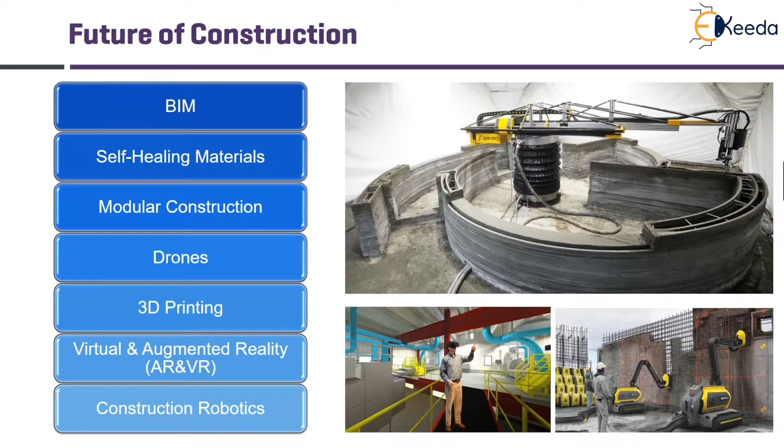Moving further to self healing materials. Self healing materials are artificial or synthetically created substances that have the built-in ability to automatically repair damages to themselves without any external diagnosis of the problem or human intervention.

In recent times, we have come across two main types of self healing materials used in construction industry, that is the bioconcrete and self healing steel. Other self healing fabrics and metals have been long used by NASA and other space agencies to coat spacecrafts so as to resist any damage in the space.

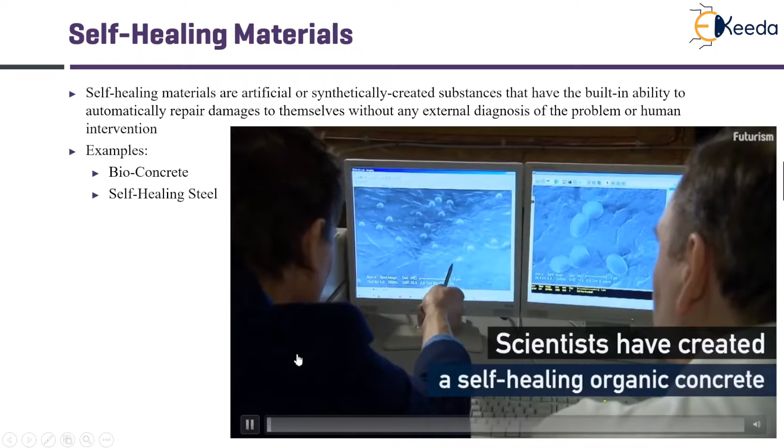Let us take a look at this video of how bioconcrete plays a vital role to change the dynamics of construction.

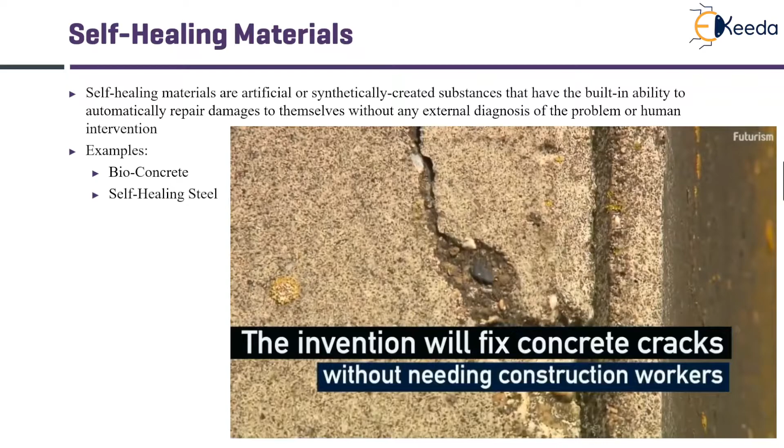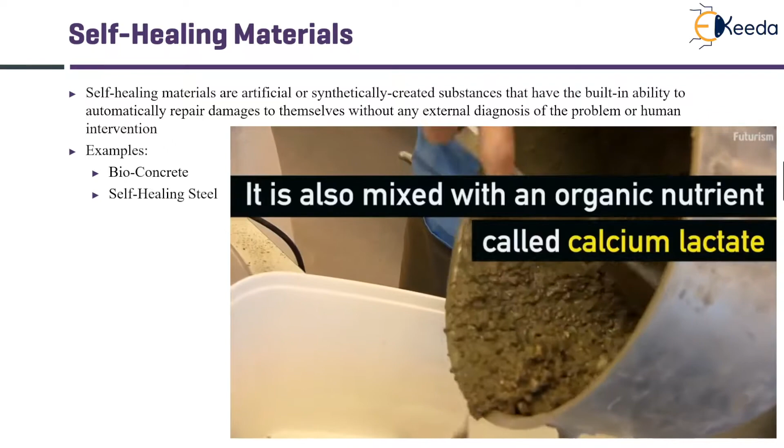Scientists have created a type of concrete with bacteria, with the intervention of which will fix any types of cracks. The concrete here is mixed with bacteria called Bacillus pseudofirmus. It is also mixed with an organic nutrient called calcium lactate. The bacteria can lie dormant in the concrete for up to 200 years after the construction, and as soon as

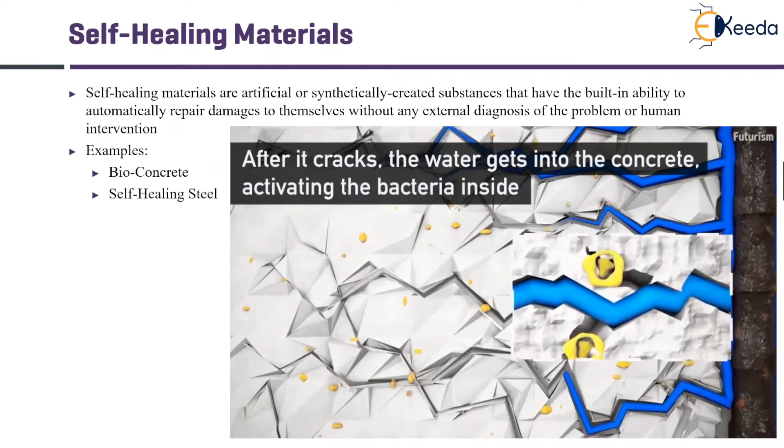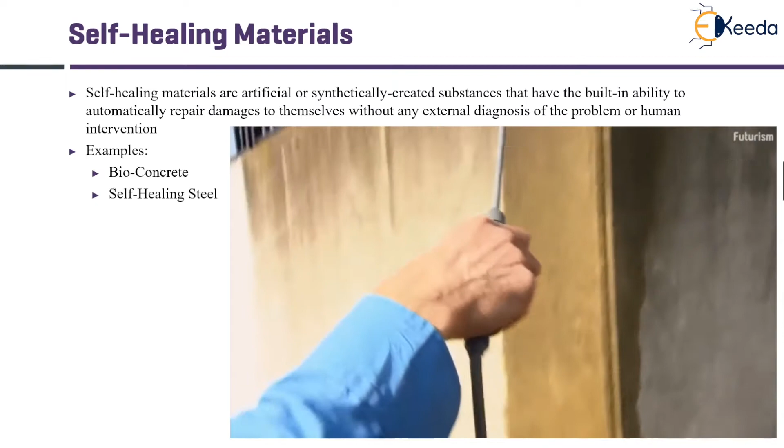there is a crack, water gets into this concrete area and the bacteria gets activated. Bacteria will automatically produce limestone, which will fill up the entire gaps. Thus, without any human intervention, the cracks are closed.

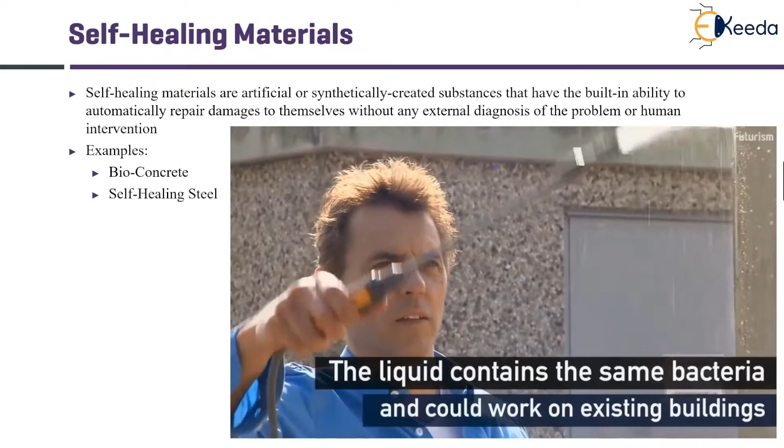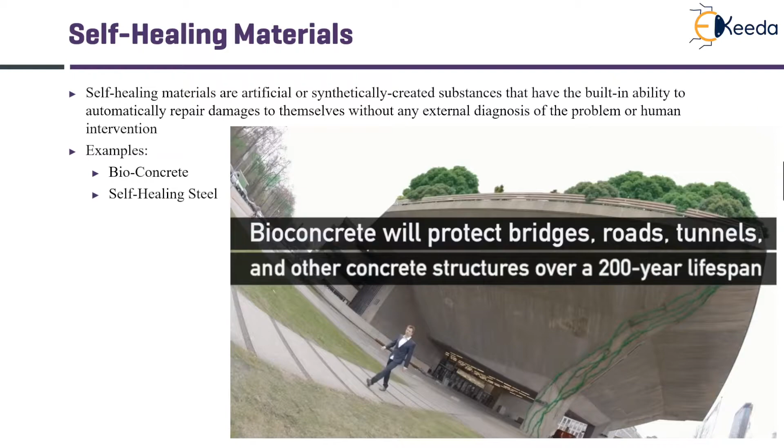Scientists are also working on preparing a liquid base that contains the same bacteria and can help the existing building to also become self healing. Bioconcrete thus will protect bridges, roads, tunnels, and other concrete structures for over a 200-year lifespan, that is almost two times increase than the current design lifespan of concrete structure, that is 100 years.

Bioconcrete, though limited in production, is still under more research and we hope that we soon will be using it.

Similarly, self-healing steel can help in healing large steel bridges in which sometimes, due to fatigue and other stresses, cracks develop which can ultimately lead to failure of the entire bridge. So these cracks get easily healed up.

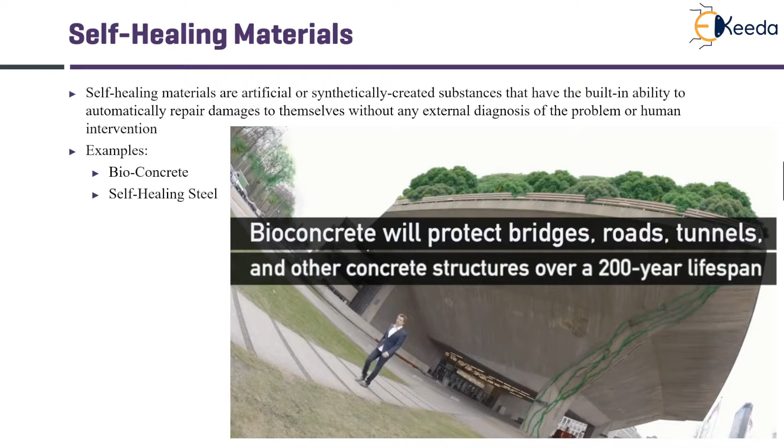Next is modular construction. With the growth of population, there is more and more demand of housing. Therefore, the government has also launched various housing for all schemes - Pradhan Mantri Awas Yojana, Atal Awas Yojana, etc. So, with more focus on affordable housing, traditional construction methods cannot match that speed. Therefore, modular construction has become the next big thing in this industry.

Modular construction is the method by which a building or home is constructed off-site within a factory setting. The most common types of modular buildings that are being built are schools, military bases, small housing complexes, and industrial facilities.

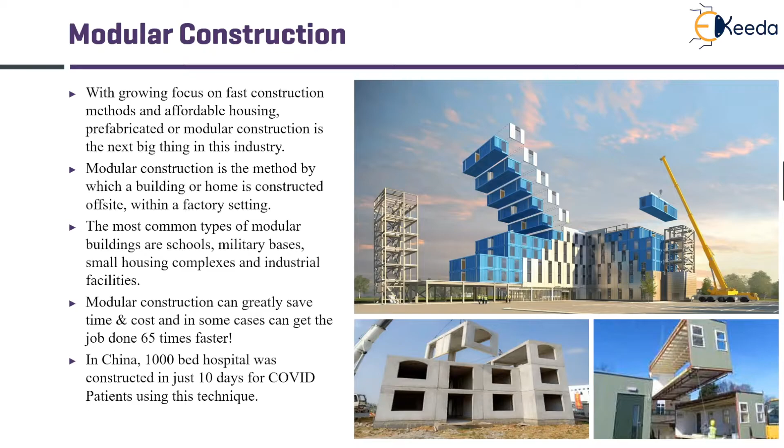Thus, modular construction can greatly save time and cost, and there is very minimum labor required on site to fix this. The job can almost get 65 times faster. That's huge. Also, recently we have seen in China that a 1,000-bed hospital was constructed in just 10 days for COVID patients using modular construction techniques.

Next big thing in construction is the use of drones. We all know about what drones can do, but in construction industry especially, the growth recorded is 239% more than any other allied industries like mining, agriculture, surveying, or real estate. This is because there are huge number of benefits associated with using drones during construction phase.

They can give on-demand images from locations which are unsafe for any person to go. This gives an increased site safety. Remote access to the current status of site can be obtained. It helps in better documentation and faster reconciliation with subcontractors since you can get real time progress. This helps in huge cost and time saving, and it will give accurate and comprehensive data.

Today, the applications of drones are in areas of land surveying, inspections, providing visual materials for the client and staff like drone photography, aerial videos, etc., monitoring on site activities as a security surveillance, and mapping the overall construction data, which will help in project management.

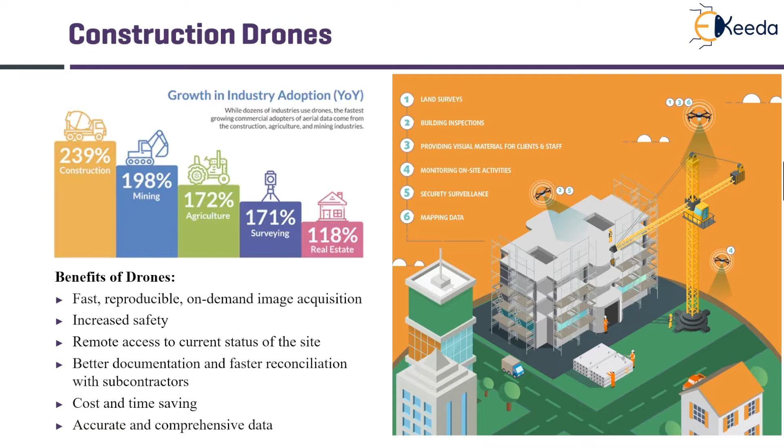Let us take a look of how drones are being used at construction site.

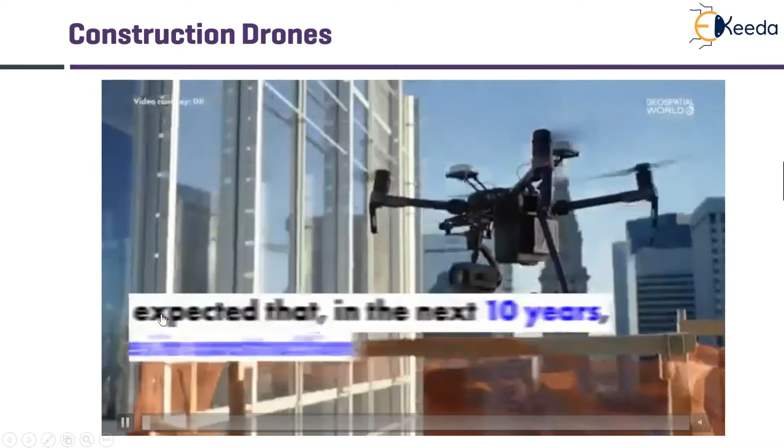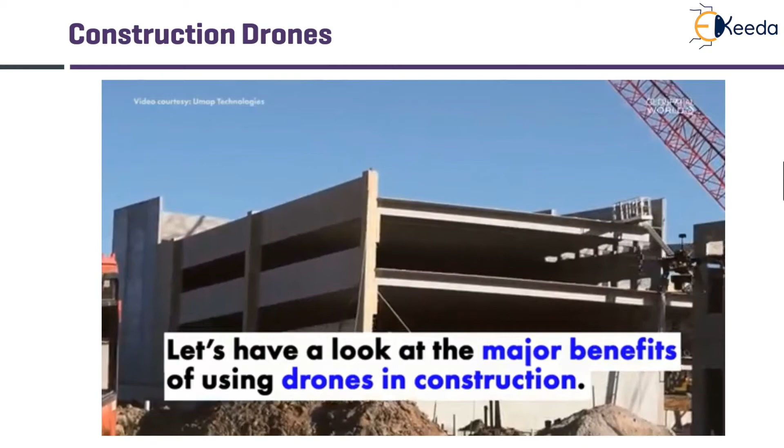It is expected that in the next 10 years, the use of drones in construction will further register a manifold growth. The major benefits of using drones in construction, as we have earlier discussed, are that they will lower the cost of projects and increase productivity. Use of drones will create newer type of jobs and further add value to construction industry.

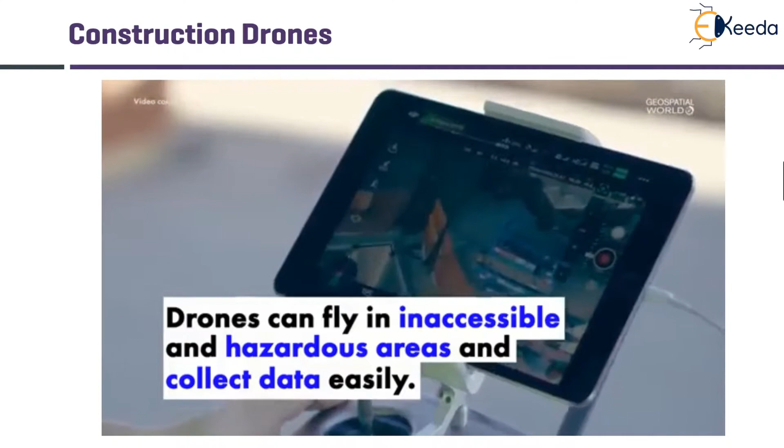Drones can fly to inaccessible and hazardous areas and can easily collect the data from there. They will provide real-time information that will significantly improve the surveying accuracy. Drones give professionals easy access to data across different departments. Also, the insurance costs for these drones are low as compared to on-site workers.

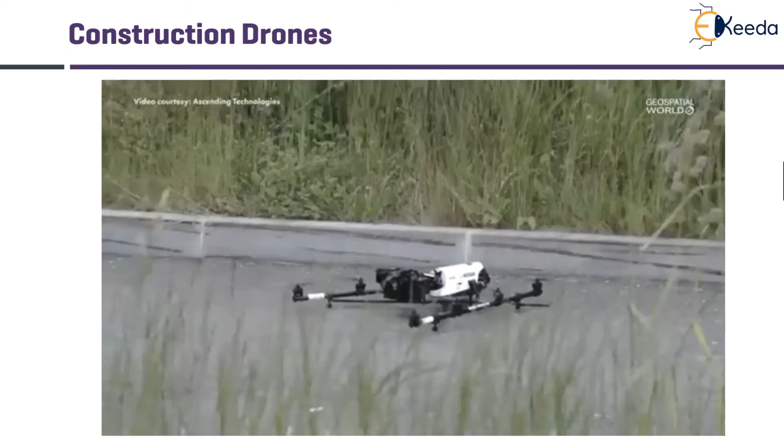Drones are fast, capable of completing a complete inspection in less than 15 minutes. Thus, drones are providing enhanced site data sets, surveying data, topographical data, etc., with good photographic visualizations.

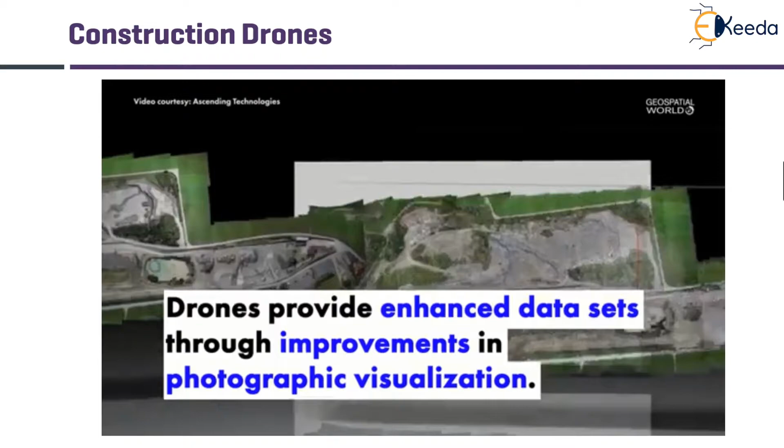Next big thing is 3D printing. Already a lot of progress has been done in this direction in the past 1 decade. 3D printing, sometimes referred to as additive manufacturing, is a computer controlled sequential layering of materials to create three-dimensional shapes.

A 3D model of the item is created either in CAD system or in the BIM model. The printer then reads the design, lays down successive layers of the printing medium, which can be concrete, any kind of powder, or a liquid material, which are then joined or fused to create the complete item.

Thus, 3D printing gives huge amount of benefits to construction industry, and obviously this is very sustainable. The construction will be accurate, faster, and directly will convert a digital design into physical.

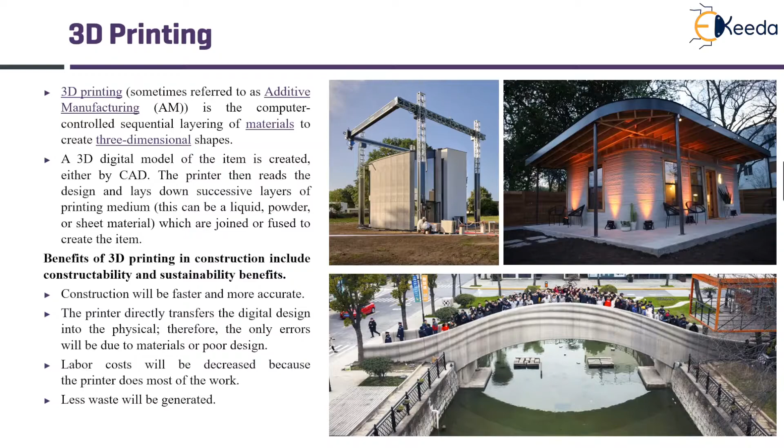Let us take a look at 3D printing for world's largest building.

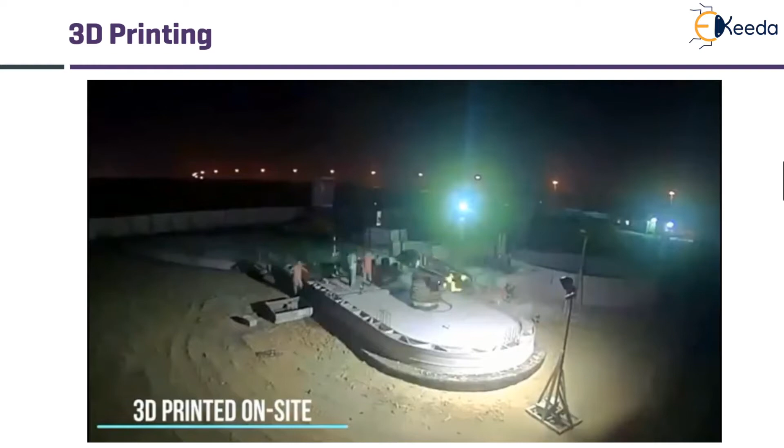We are currently looking at one of the largest 3D printed house, which is 9.5-meter tall. It is of 2 stories and completely 3D printed on the site.

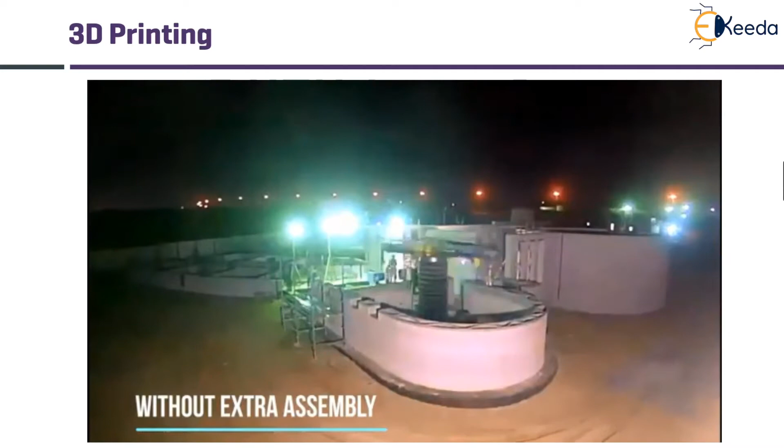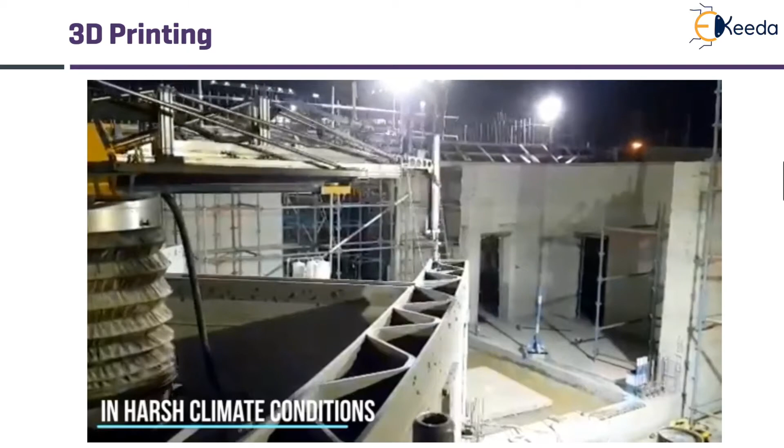You can see the movement of the 3D printer, how layer by layer it is laying the locally produced material like concrete. It can work even in harsh climates without any human interference.

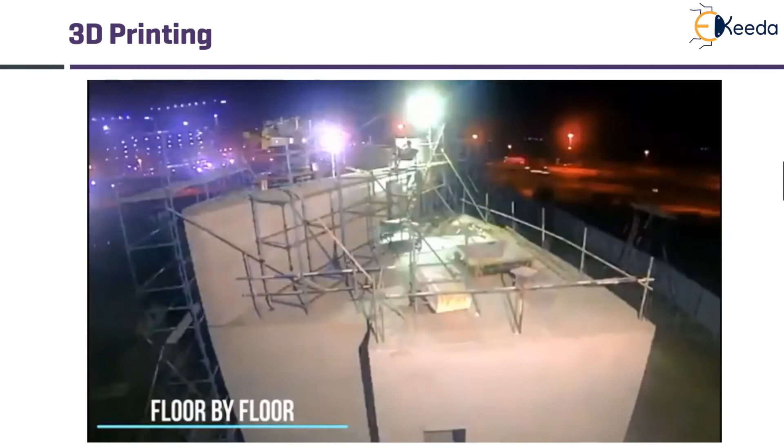Floor by floor, it is completed, slab is laid down, very minimal human or labor requirement is seen on the site. Here, a complete view of 640 square meters floor area of this project can be seen.

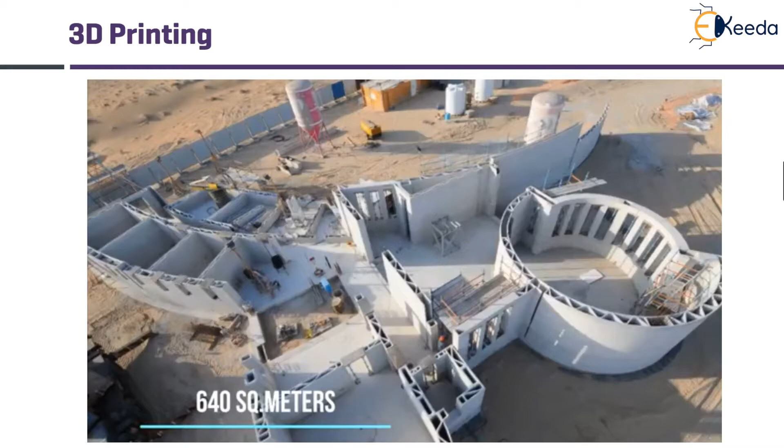Next is virtual and augmented reality.

We are now pretty familiar with augmented reality and virtual reality as it is becoming more and more common. Some examples of augmented reality experiences include Snapchat lenses and Instagram filters, which use this technology. Augmented reality adds digital elements to a live view, often using the camera on a smartphone or tablet. This technology fuses the digital world and the physical world together to help us understand things much better.

Virtual reality, or VR, implies a complete immersion experience and shuts out the physical world. For example, by using a Samsung VR set, we can completely visualize the construction that is going to happen in the future right in front of our eyes.

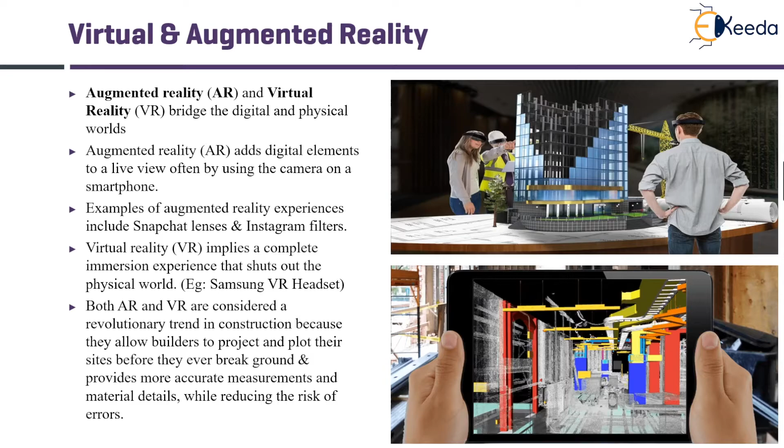Both AR and VR are now considered a revolutionary trend in construction because they allow builders to project and plot their sites even before they break ground. This gives clients a better idea of how the construction will take place, and also provides material details while greatly reducing error and its risk.

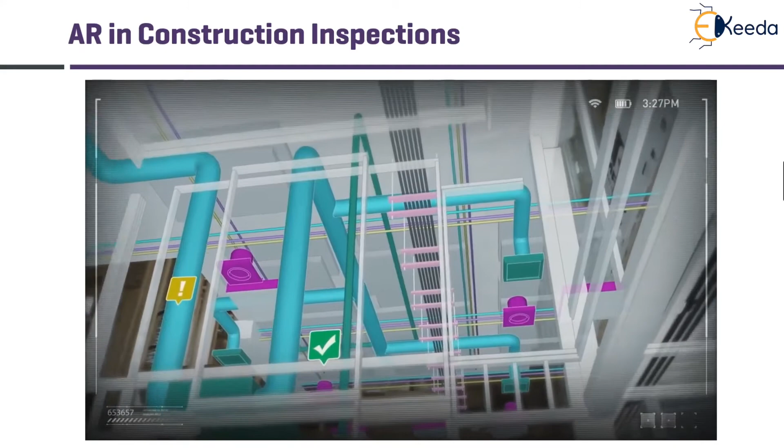Let us take a look at how augmented reality can play a major role in construction inspections. This is a concept demonstration for smart glasses which track the movement of the inspector through the plan and continuously record how the work has progressed, checking it against the 3D model that was designed.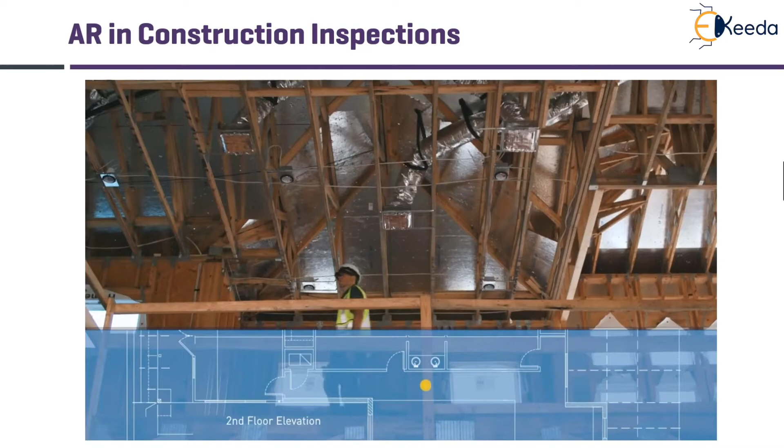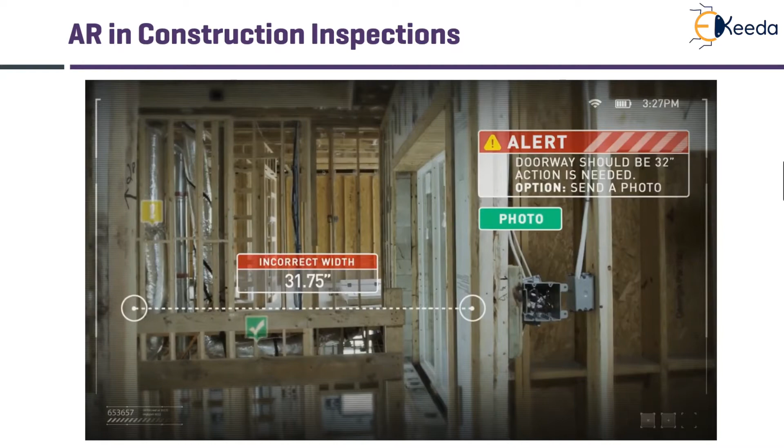It is capable of tracking real-time data against the original model and can immediately issue an alert. Here we can see that the computer has given an alert to check the door dimension, which is incorrect width. The actual width should be 32 inches, but here it is 31.75 inches.

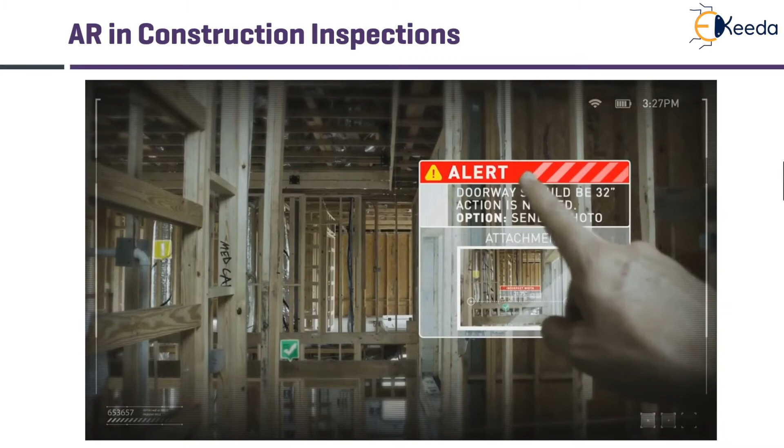The inspector can immediately capture it with the click of a button, attach a real-time photograph to it, and send it to the project manager for immediate action. You can see it flashes on the computer screen of the project manager, and thus he can immediately issue orders to correct the framing for the door.

This is a small demonstration of how easy inspections will become in the future.

Next is robotics in construction. Once considered an impossible task, today robots are very much on site and are doing much of the repetitive tasks. We all know the construction sector is labor intensive, but with the advancement of artificial intelligence and robotics, it will no longer be dependent on labor.

Introducing robotics will lead to a faster, cheaper, and safer way of working on site. Robotics has proven to improve work productivity by almost 10 times. Some of the main advantages of using robotics are fewer errors, that is, better quality, less downtime, higher productivity of these machines, less space utilization, better energy efficiency, improved security and control. There's also a reduction in pick, pack, and ship times.